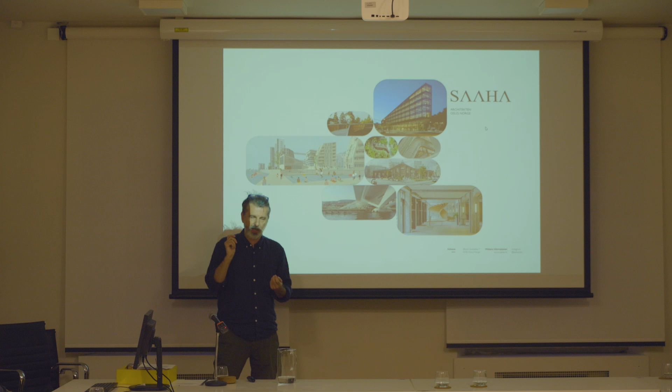There's another tendency and trend we all see, for sustainability reasons - I think architects, traditional architects, if we're going to have any role in society in the future the way we had before, need to start designing with the surroundings or environment as the starting point - outdoor spaces, biology and landscape. So I'm almost tempted to take a master's in landscape architecture, because it changes the way you enter the project, influences the project.

Bjørvika that we saw, I think it's also the first really bigger plan, and maybe the last, that was really designed with outdoor spaces as focus, and then the buildings came. Because what we usually do as architects is first think of objects and placing the square meters, the heights, and then the landscape architect comes and fixes some greenery in between.

I hope the future is more that we start with landscape, start with outdoor spaces, because that's something we can all agree is for the common good, and at the same time has a positive consequence for the economy. It creates value for whoever is the investor, and it's easy to communicate that. Everybody kind of wins with focusing on outdoor spaces.

So that's a kind of point, even with the choice of colleagues I brought with me from Norway - that was already a point I wanted to make, that there is an important tendency there.

I need to say a bit about the office. I'm between Oslo and Sarajevo, now a bit more in Oslo than in Sarajevo, but I lived there after the war for 3-4 years and started an office there too.

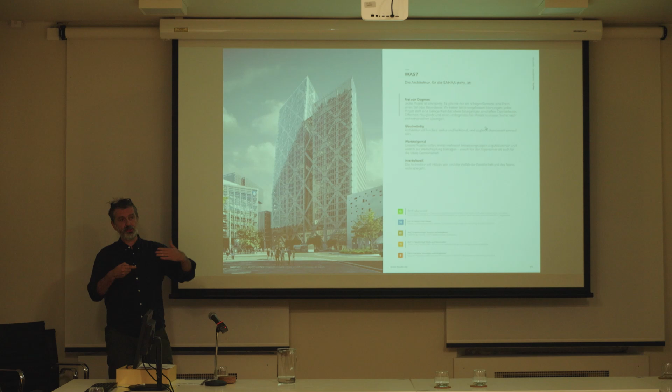We are just 12 people, but out of 12 people we are from 7 different countries. Aside of Scandinavia, there is Singapore, Germany, Slovakia, and this influences a bit the way we approach discussions. We all have this kind of relation to another context, but also a position of somebody who observes at the same time while we act, and that gives sometimes interesting perspectives.

What we do and how we do it is that we try to always cooperate. Even this thing here, it's cooperation - I kind of reached straight away to you too. As a small office, if you want to be involved in a bigger project, that's been interesting for us, because I earlier worked in a bigger office with many more employees.

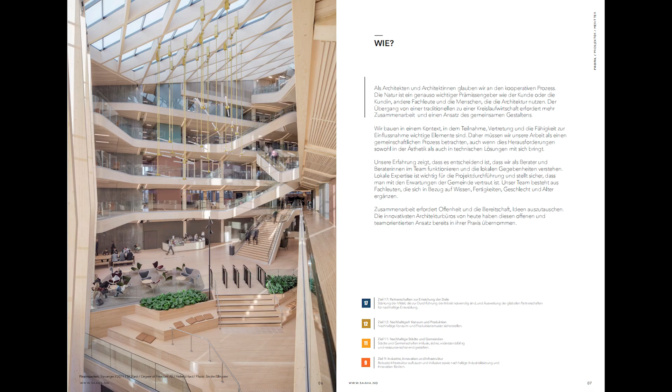We also think, for us as an architect, we like shifting scales from small to big. So I'm, at this point, involved in several detailed zoning plans, but we also work on very small projects that are kind of an entirely different process and entirely different scale, because I think this keeps us more agile and brings different perspectives from each of them to these contexts.

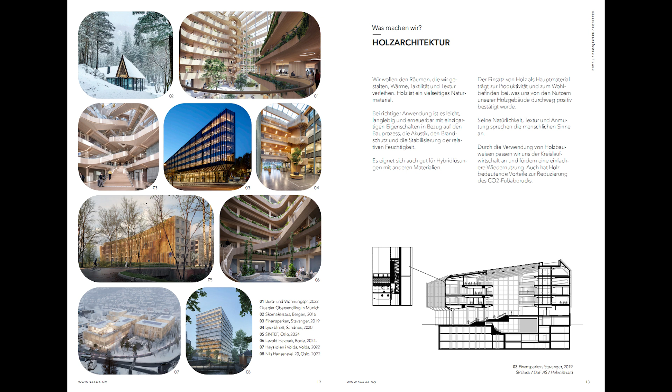Again, because we are small, we need to have a large network that we can always include, and most of our projects are in one way or another collaboration. We do a lot of timber architecture in Norway, some of the projects are built and some are underway. As a very few architects, we are also involved in infrastructure, so we built at this stage quite a big bridge in Drammen, the city that you were talking about.

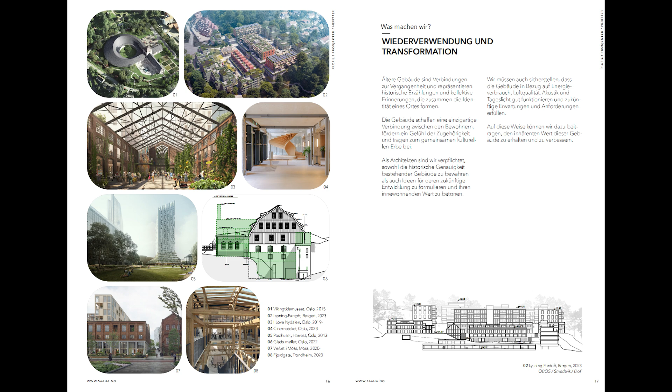More and more of our tasks are about adapting existing buildings that are often involved with the heritage authorities and these kind of things. Our office is also in one of these buildings - this is a power warehouse, and we sit here and overlook the river in the middle of the city.

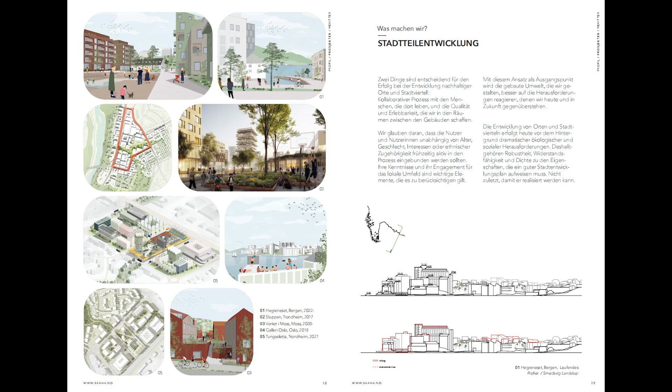And then, of course, urbanism, that we will talk a bit more on. And then I have this kind of bastard brother or sister in Sarajevo, where I have another partner, where we do a lot of different projects. I'll just briefly show you some of them.

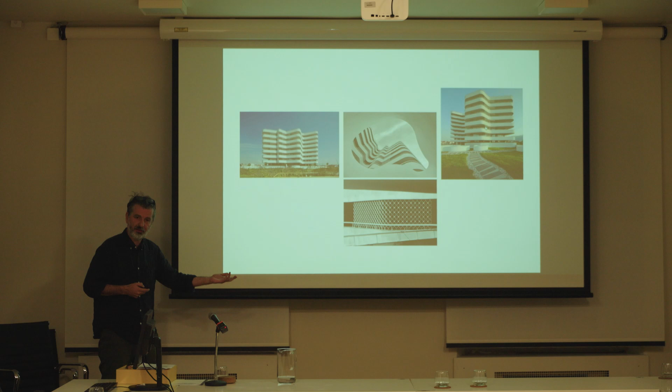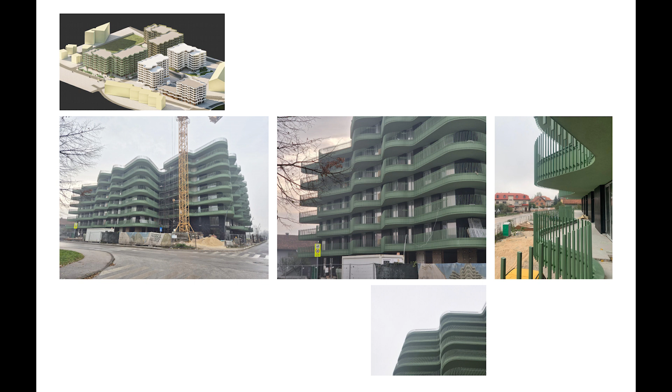So this kind of architecture for a regular housing project, for different reasons, is almost impossible to realize in Norway. And this is a next phase where we work with the same team. Every flat has a balcony, but we do another kind of detailing and another kind of variation on the same theme.

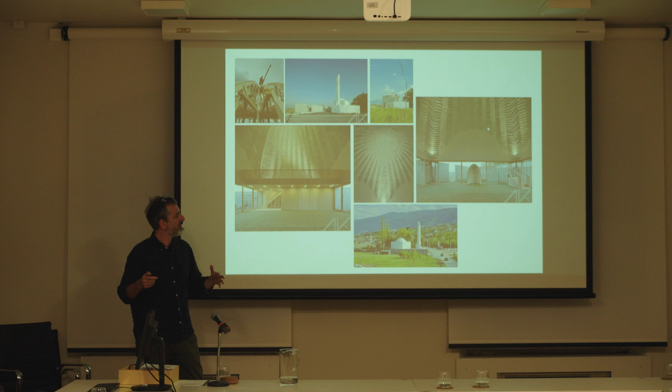We also do this kind of very small projects that are somehow important for me, because in the society after the last wars, there is this kind of fraught way of thinking about belief or religion. And in Bosnia, we always had these neighborhood small mosques that were just for like a neighborhood.

One of the projects that we are now doing for 10 years is this, because it's built by people who live there, and this is all cast in concrete. And for you that maybe don't know so much about it, in Islam it's not allowed to have any kind of elaborate pictures and stuff like that.

So we managed to persuade relatively conservative people to open all of the first floor towards real gardens outside. So instead of painting them on the walls, we tried to establish gardens on 3 sides of the prayer room.

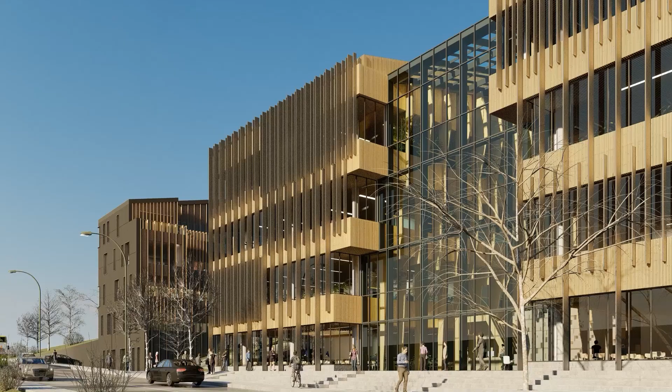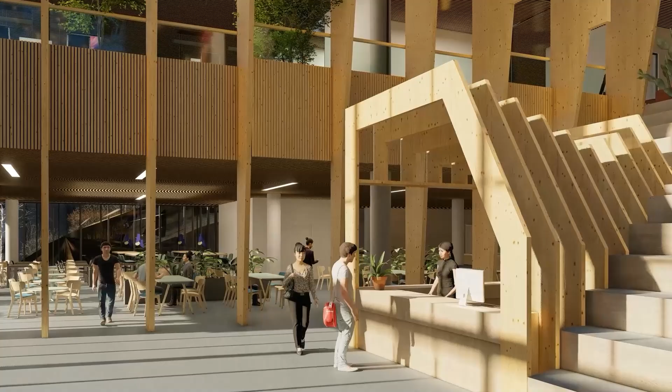This kind of project is one of the reasons why we want to shift between scales. We also do a project for the Croatian company Infobip. We won a competition against 3LHD and Amir Vuk Zec, where we tried to argue that whoever works in Infobip in Sarajevo, they should know that they are in the Sarajevo campus and not in the Zagreb campus or in Vodnjan.

This idea of all the Bosnian canyons, river canyons, results in this space that connects the park behind the building and the entrance, car entrance in the front - that was a theme that we worked with there. We also introduced timber as something that we have a lot of in Bosnia, but use too seldom.

And the office, in this kind of structure, exists for 10 years, and we've managed to have some success even as a quite small practice, and to be nominated for some prizes, which is always nice to get that kind of recognition.

So, the importance of compromise. We've already talked a lot about this, the fact that we need to find a way for everybody to feel that they kind of win something in these kind of processes.

I will touch upon in more detail how a regular zoning plan is done, and exemplify it through a project we just delivered. We had the second delivery of a zoning plan, meaning it goes to the town hall to be politically approved and cleared of all issues that need to be cleared off.

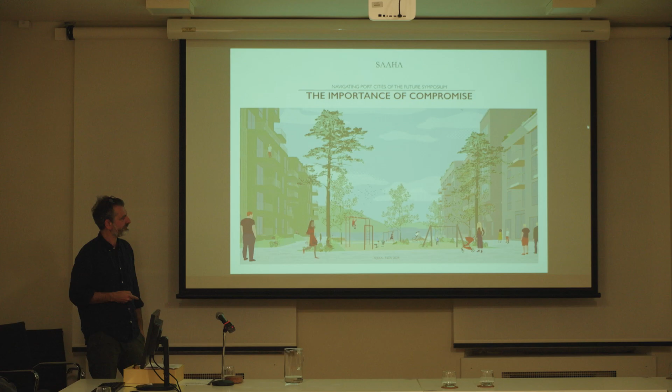So, if I place this slide in front of you and you read it, what's your first association? What does it make you think? Lack of trust between the involved parties. Politicians don't trust their own experts, the planning office and other specialists. Investors and politicians, depending on which side of politics they belong to, are either too distrustful or very naive when it comes to private investors' intentions and ambitions, and the general public doesn't trust any of the sides.

And I also think the plan of Bjørvika is probably not any more realistic, because something happened in these 10 years. That plan was approved just at the last moment. Maybe there are also global issues, and I feel there is a certain balkanization going on at several levels in the global context of how people deal with each other. This has become reality, also in Oslo.

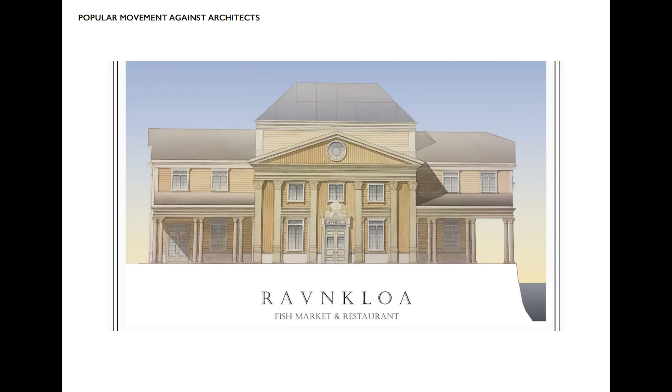I want to exaggerate this point a bit because, of course, when we come from these areas, we all think things are rosy and nice, but this is an interesting thing that contextualizes where we work and what we, as architects and planners, also need to somehow deal with. We need to figure out how to navigate in this landscape in a good way.

But it is interesting because it kind of oversimplifies the architecture and development of urban development, reducing it to aesthetics and facades. This has also been a quite public debate. I think what we can thank them for is that they really brought public interest back to architecture, because before that everybody was used to that kind of architecture.

Scandinavian architecture is respected abroad, but this varies a lot between the Scandinavian countries. So I think, Ellen, maybe this wouldn't be possible today, the Barcode project, because it was in a specific time after the financial crisis when the Bjørvika plan was approved. With all these different factors, the way things are done, maybe it would have looked different today.

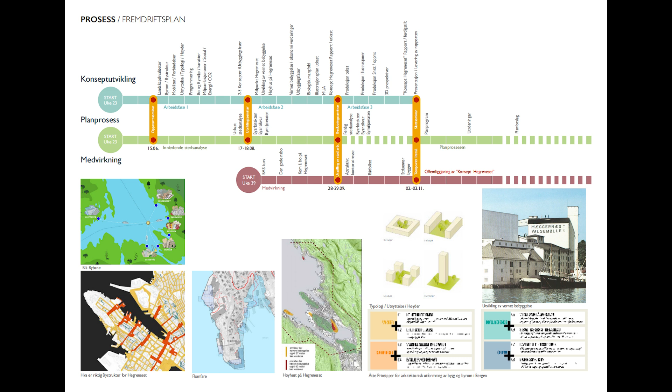And they should relate to what already exists in terms of strategies and plans of the city.

One of the important strategic documents in Bergen City is called Architecture Plus, developed by a city architect. It's important because, with the way our profession developed, we somehow developed our own language that nobody else understood but us. This was also causing issues in the zoning plan processes, because people used the same terms but really talked about apples and bananas - they didn't have the same associations when they used the terms.

So what the city architect did was make a popular version of what they think quality in architecture and city development means, and what they want us to discuss when we come to talk with them. I used Google Translate to translate this document - it's only in Norwegian, unfortunately. But there were really simple points, and for each point they did extra texts to explain what they mean by it, what they mean in a local context, and exemplified it with some projects.

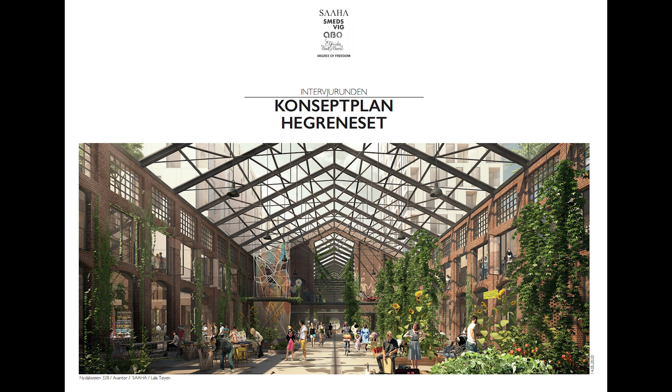So when we come back to this concept plan Hegreneset, this is the site. It's a kind of peninsula, almost like an appendix. City of Bergen is here, the architectural school in Bergen is here. It's very much part of the fjord - when you enter by boat, you enter like this and see it, then you go back to the sea.

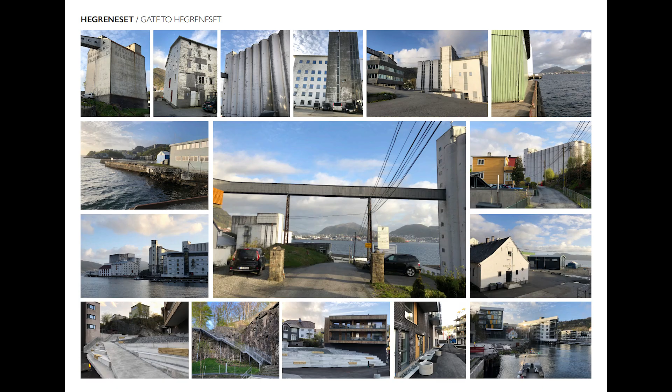It was obviously an industrial zone before. There are some buildings with heritage value that are protected, and some that are not really protected - they're listed but not fully, so there's a possibility to discuss them. It's a very diverse and quite resourceful neighborhood in a vicinity that already exists.

Our brief was summed up like this, and both the city and the client - this is a bit of the old way - talked about how do we make this area a destination. In the context of Oslo and Norway in general, when you say destination, very often architects think of objects or a building that's a goal to get to, or something kind of expressive.

What we did here is collaborate with a landscape architect called Smedsvig, and we also have a local zoning specialist who is good at writing the zoning rules. We are only architects that push forward and run the process, while they do a lot of the handcraft themselves - this is something we always do. We always work with local offices, because you lose something otherwise. You can travel there and do a lot of registration work yourself, but there's something about having an ear to what's happening locally that's hard to pick up on if you don't have a pair of ears in the city.

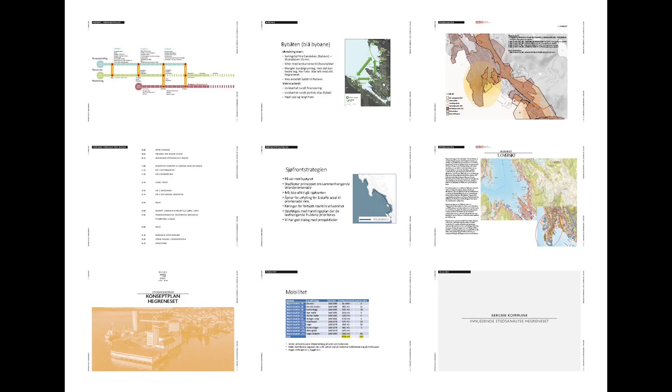After this initial phase of planning design, we approached the project. We studied, of course, history. We studied the landscape. We studied the social infrastructure that's there - what do we need to answer?

Is there a need for school, for kindergarten, for these kind of things?

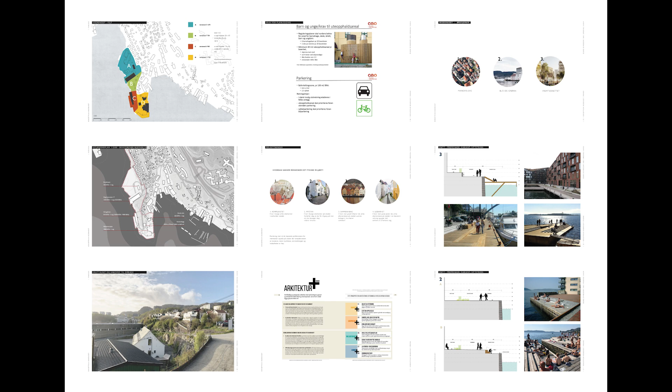We also started topographically to cut the land to see what pieces this consists of. We understood very fast that this area with villas is a kind of resourceful neighborhood that we knew would have opinions about the development, because these villas are protected—some of them because they were built by a famous Norwegian architect, and built in relation to the industry activity there. So there was a kind of value, not necessarily individual, but as a neighborhood, as a representation of a certain time.

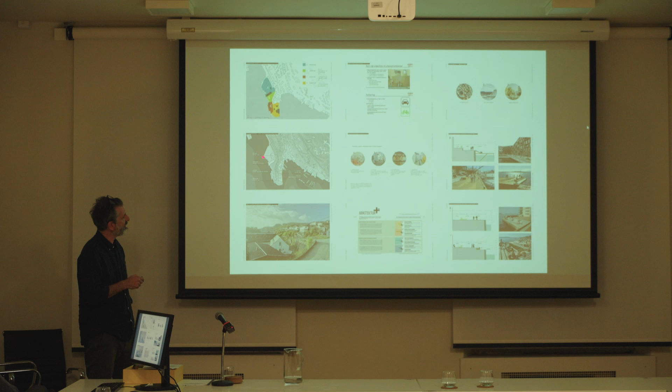We started also straight away discussing the edge towards the sea. Some places are deep water, some places are a bit more shallow. This combined with more concrete provocations on what development could look like in the future, with some concepts trying to take inspiration from historical images and maps that we found there, and just a lot of iterations of different things just to provoke.

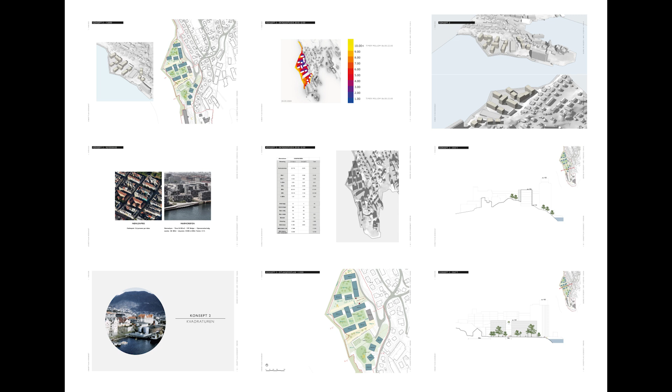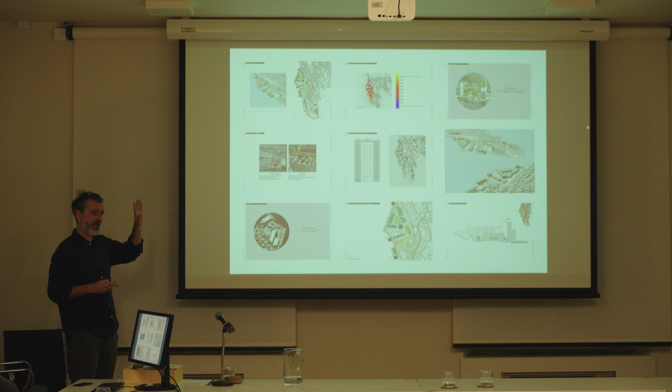This same material is used towards the client and towards the municipality. That's something we always try to be conscious about—we don't make different presentations for a client and for the public, and we try to agree with the clients on this issue.

Maybe what we kind of take away is the numbers, because that's not something we should discuss about—it's not about numbers in a way. In these initial phases, rather than designing too far, we use a lot of references to what kind of architecture, what kind of public spaces, all sorts of things.

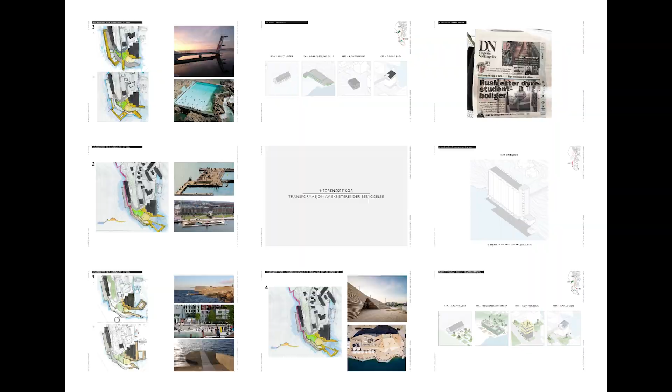We try also—the landscape architects start already designing some meeting points with the sea and what that could be. We looked into the buildings that were listed, what they could contribute, and this is almost our own project. We had a group working parallelly analyzing what the heritage, the listed buildings, could be in the future and how they could be used.

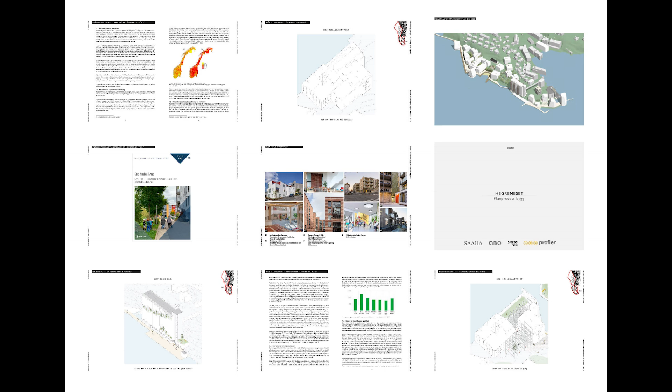The issue with listed buildings and investors is that they see it only as a cost, because of course they are very expensive to adapt, and they are rarely a type that can be used for housing.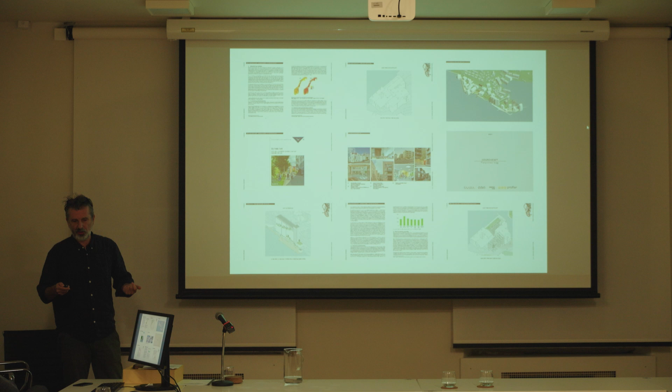So in our case, we ended up proposing a silo as housing, and a little piece of this old storage building, but the rest was proposed from our side to be a place where you can have a communal house that you can rent for a birthday or a wedding or something like this.

This was developed in more concrete sketches—again, this is just a concept plan, and I show it because it, of course, changes through the process. What we did agree is, because these neighborhoods want to keep the view to the sea, we need some kind of communication lines going through the different places.

What also really appeared as a discussion very early on is that we propose each of these areas should be car-free, because it's almost like no place for anything else there. This ended up with a solution that our client gladly accepted, which isn't always the case—they need to build a tunnel that goes from here, leading to a parking lot under here that serves the whole area. The rest is car-free.

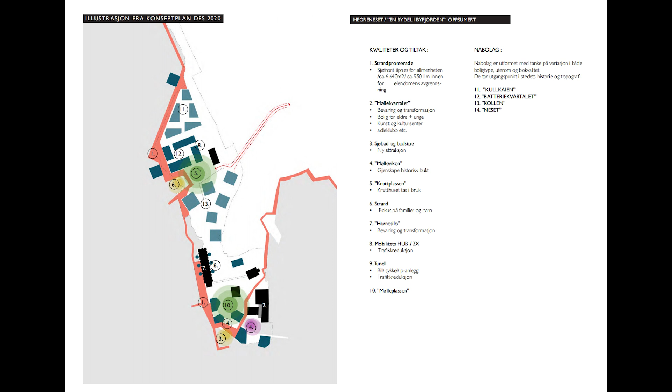So the distances, and what this destination in the project ended up being, are two public spaces, two kind of squares—one in the beginning very oriented to the sea and one more enclosed. This also changes a bit. Of course, again, the line of connecting the shore and the possibility to continue northward. It's approximately 950 meters of shoreline that will be made accessible to all neighbors, also the ones that are there from before.

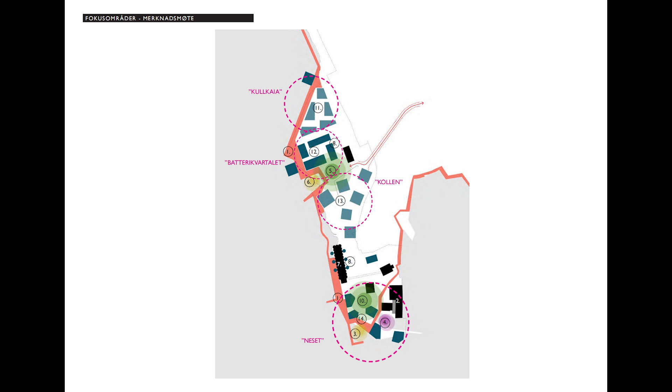And there you start developing also identities—you start developing names for each part, because here it was a place where at some point there was a coal storage, so that takes on a certain identity and tries to build on that. Originally this was used as a battery place for guns, because it was a kind of fortress very far back.

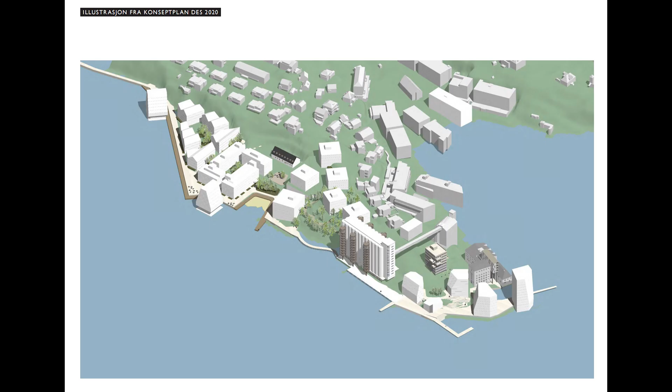And then, of course, the Kollen means the top, and so on. This was the physical appearance of a concept plan, which we discussed with the municipality. We developed a lot of sketches trying to envision what kind of spaces this could be, and we consciously kept them at a sketch level, because there's been recent debate in Norway about architects making overly realistic renders that don't actually happen in reality.

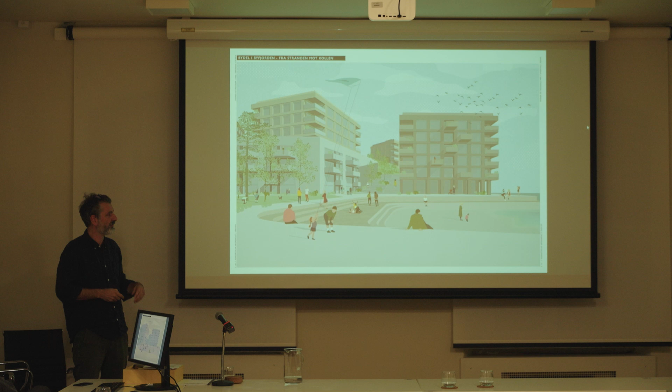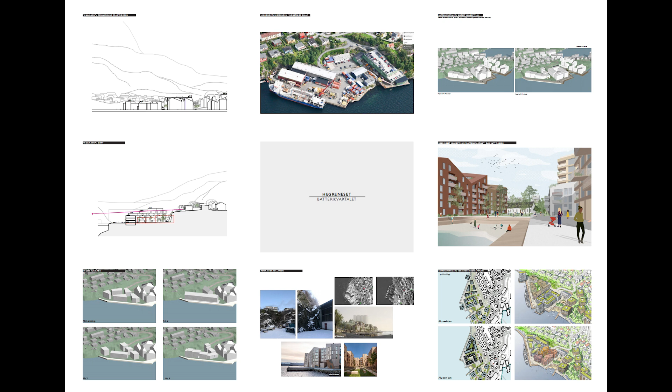So we made clear this is not necessarily how it will look, but tried to show the intention and ambition of the project, and what kind of connection we want to create. It was a separate document that became the basis for the planning initiative, then development started.

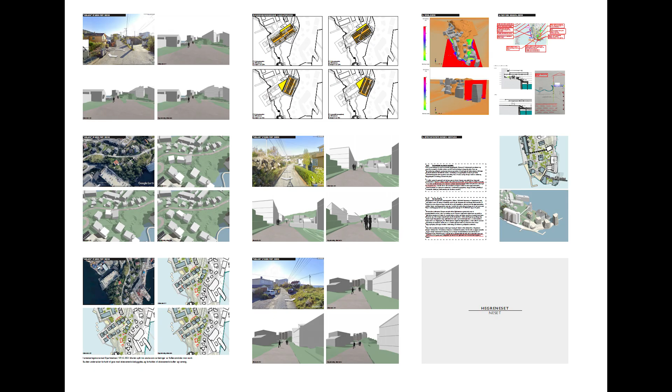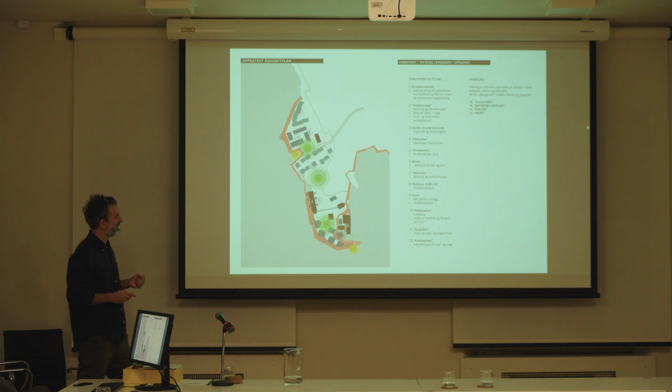New iterations then happened with the municipality. I'm not sure if all the time spent in this phase is so valuable, because you'll see what we end up with in the plan at the end. There are changes, but in the planning map, a lot of things we already decided remain intact. This is after one round of iterations with the municipality, and it became the basis for the first submission of a plan.

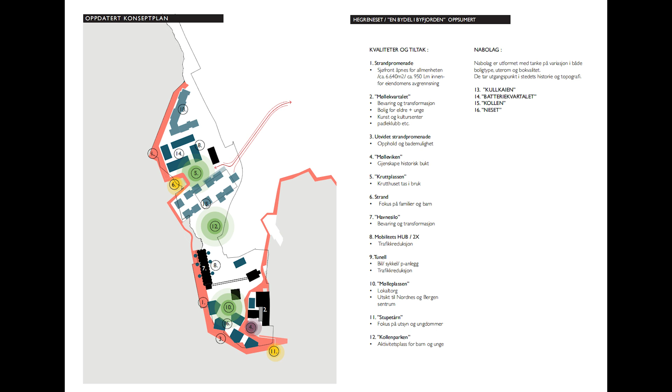What we managed to persuade and find a win-win for everybody was getting the municipality, and also our client, to agree that this place, which today has only 2 detached houses, stays unbuilt and becomes a kind of central park between the northern and southern neighborhoods. We also argued it's cheaper, since that's the kind of argument they respond to, because it's cheaper to build these buildings if we push them north, since it's already flat and you can devise a tunnel that's cheaper to build. So there are pragmatic reasons why it ends up like this, but it wins back a big value for the neighborhood as a whole.

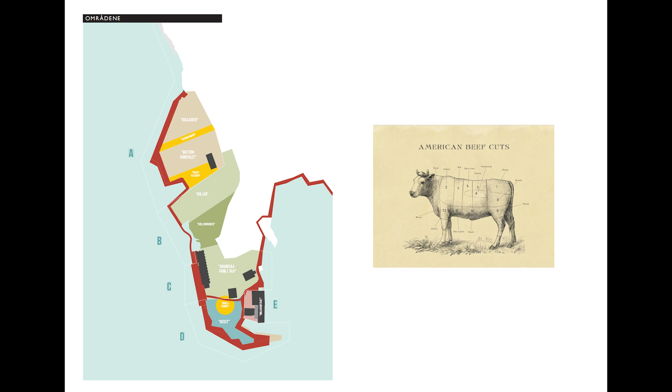This park also adds to the destinations still there in the north and south. After a while you start doing these kinds of divisions - how does this happen in reality, in phases and so on. This becomes the basis for a planning map.

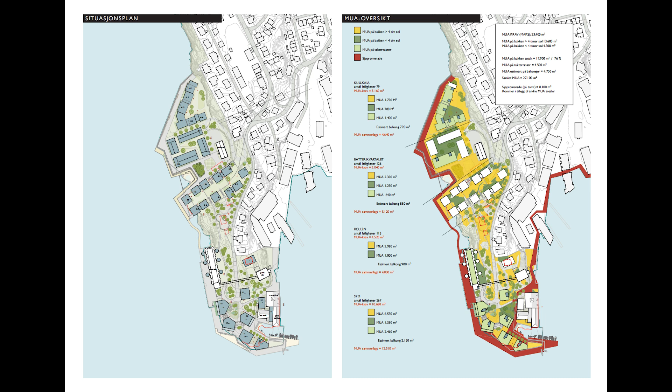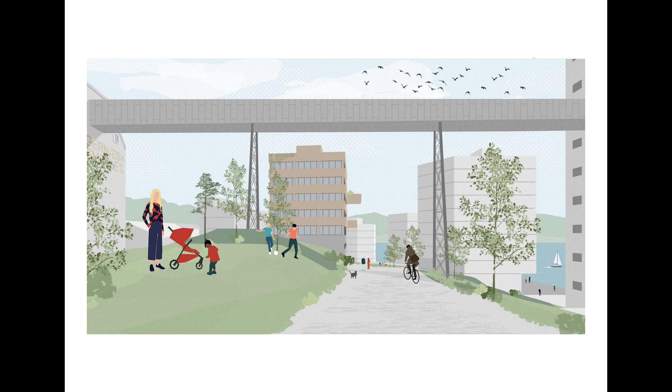The landscape architect develops an illustration plan showing what this could be, accounting for all the outdoor spaces needed while still allowing you to build the housing, plus more sketches showing what these public spaces could be and how you approach the area. You saw the image initially - how does this affect things, but also how do the owners of the villas still keep their view? This is an important illustration to help get the plan through.

But then, you know, after you deliver the first phase, we are now with the municipality. You have a hearing first, so everybody can respond to the plan and give feedback, and you get a table with 150 comments on your plan, where maybe 35 are from private owners of the villas, and the rest are all from the departments - heritage, water and sewage department, and so on.

Yeah, they are very important, because you need the infrastructure to work, you need agreement, and also mobility in a way they accept - there was discussion about how you clean snow from the public spaces and all this stuff. So they need to accept reduced access for cars for the sake of housing quality, and this needs to be sorted out. Then this ends up as maps and formal documents developed as a result of that.

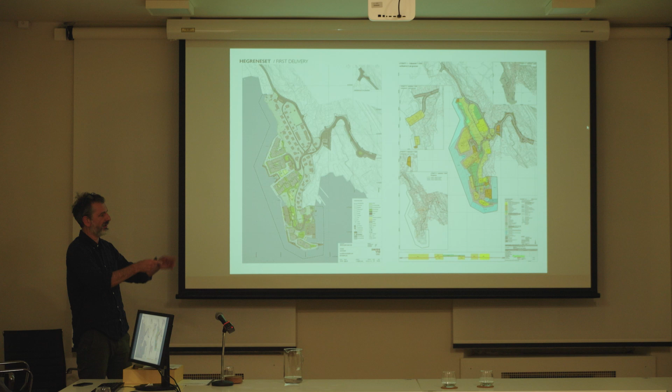What's also interesting is that the tunnel suddenly splits into two arms: one goes straight into a parking lot, using the height difference between the two levels to kind of disappear under the buildings, and one arm goes over here for bikers and pedestrians, so cars and bikers split under the ground. Of course there's an enormous amount of attachments that follow these plans, but these two documents were, strategically, the ones really defining what needs to be seen as a quality that shouldn't be discussed later on.

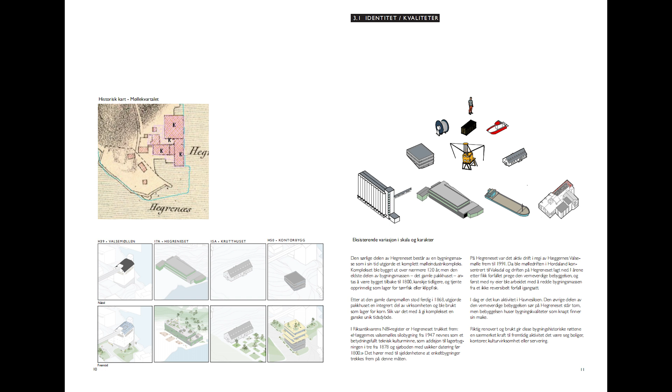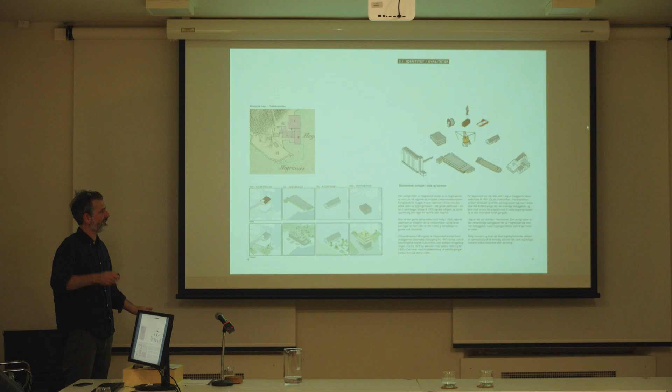I wanted to show a few pieces here. We discussed historical buildings, and we found this little bay that was there before, which we reopened in our plan as part of the project. There's also something interesting about this place—it was always used with really large scale differences, because of the silo, individual housing, and the boats that are big. So we wanted to keep that in mind while working.

And then there's this really great wooden building that was, of course, storage at some point. Both these two buildings are listed. It was decaying—some floors are disappearing—but the structure is intact.

We proposed to remove some things and open a passage through, making this part a kind of communal kulturni dom—something you can use as a neighborhood space, but not a cultural center in the organizational sense.

For these parts here, we suggested that—because Norway has a bigger and bigger elderly population—the projects that are always difficult to find a place for are the ones developing housing slightly different from the standard housing sold on the market.

We suggested that these buildings, which are difficult to develop as regular housing for the market, could be discussed between the municipality and a private investor—whether this could be housing for elderly, students, combined with an element of communal function.

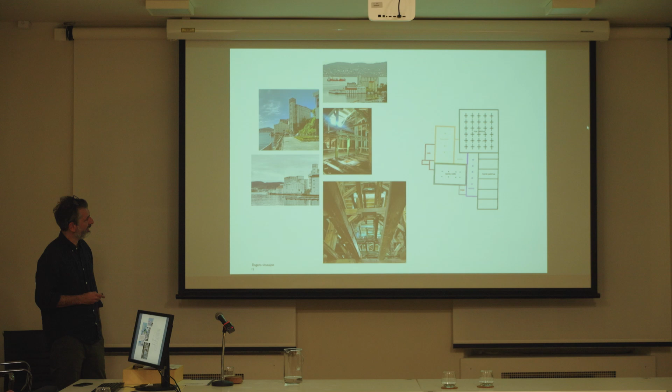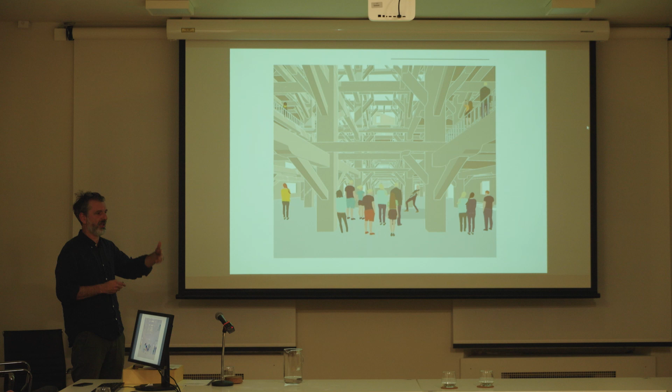We saw this as a kind of cathedral that can be kept as a raw building inside, one you could rent out, either for a birthday, a wedding, or some kind of school celebration from the neighborhood.

We studied the structure quite thoroughly to figure out if we could add some floors and how to do it. We also discussed this—it wasn't done just by us, but by people who are representatives of a cultural guild of the city.

People running different cultural institutions discussed what this could be, what it could be programmed with, but without deciding it.

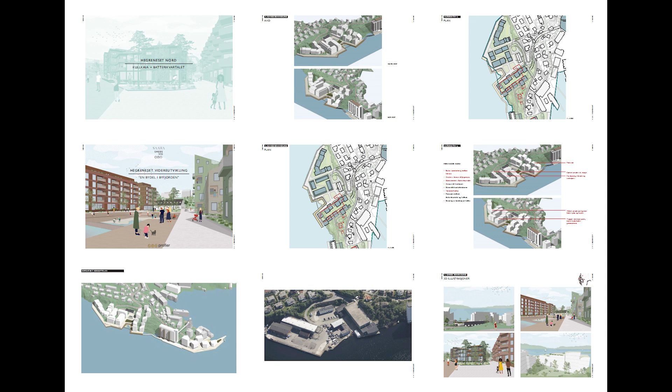After this, it takes time—it's another round of iterations and nudging to get everything cleared up.

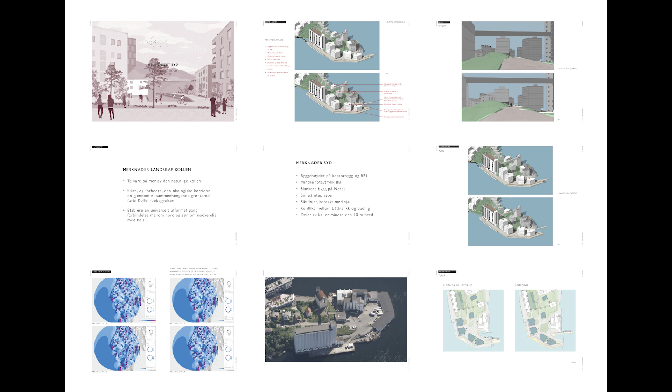I'm not sure if we even looked at totally different typologies for this place to see what kind of area it is, including both wind and sun and these different factors, because there are quite high tides and also waves in these areas—just to make it a comparable, equally long list of attachments.

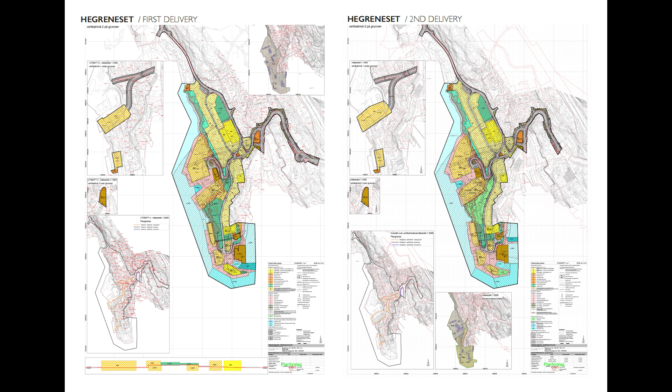A year spent, and there's not so much difference here. It's a lot of resources used, both from the public side and from the investor side.

In a way, I think this has become an issue, because society is really—well, it's over-bureaucratized—so you get this process of iterations that don't necessarily lead to better projects. Maybe we try to agree on things that we could agree on later, in the building phase. So I think it's an interesting time to evaluate this at the end.

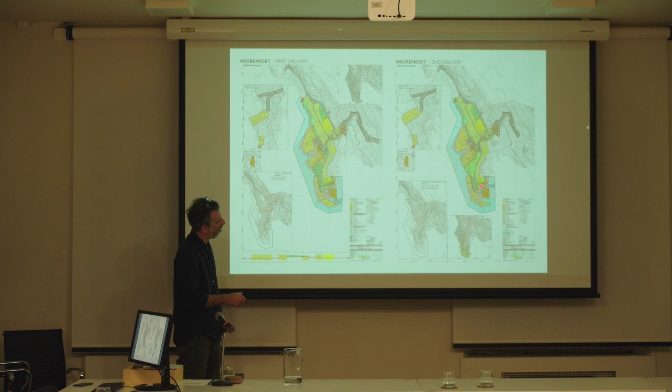You see we have exactly the same thing we had in the beginning: one destination public space here, another one here, a park in the middle, and the whole coastline free and accessible to the public. So all the qualities we had from the concept plan, which took half a year, are still intact—but we then spent four years developing things into a formal solution.

I think the benefit—I mean, it sounds weird—but I think our client expected this to take much longer than it actually took.

So it took 4 years, and we are now waiting for it to be politically approved, and it will be approved because everything is cleared up. But I think it made the process smoother.

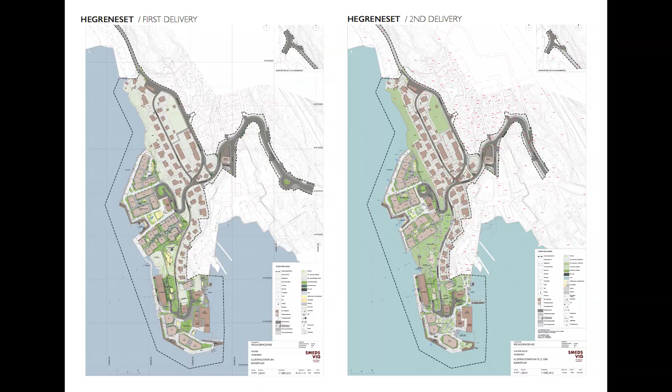I forgot to say, but in this pre-formal phase, because in formal phase, also like here, you're obliged to do participation, but it's very often just to tick a box rather than really influencing something, because the plan is developed so far that you cannot do such big changes.

So we did have a workshop with the school. There is a school over here, and we did it with the neighbors about what kind of functions, public functions or services would they like to be present when the shoreline is open. So there's like public toilets, a place to store canoes. I mean, it becomes very concrete.

And also it was very easy, it gave us arguments towards the client and towards the municipality to use the first floor of the silo, and to kind of also keep this part less commercial of the old buildings, because we could kind of say that we can care for that kind of functions.

But we wanted just to have, because of course these courtyards, they are very much kind of micro spaces for those who live here. But we wanted to have this hierarchy in a type of spaces that makes this a bit more accessible, so that all people who live here can feel that they can get there without really intruding into somebody's private area, while the private areas are more kept towards the courtyard.

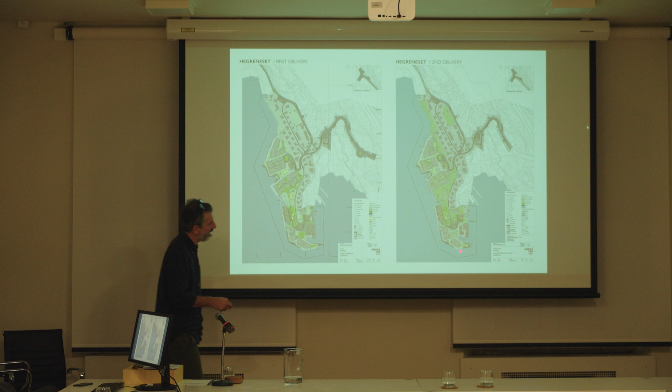And then the park, and the same here, the value, I think, the biggest value of dialogue with the municipality is that this did open towards the sea also. And because there was a building here before, but this building did become larger than I think is good for the area. We tried to keep it separate before, but then it became one.

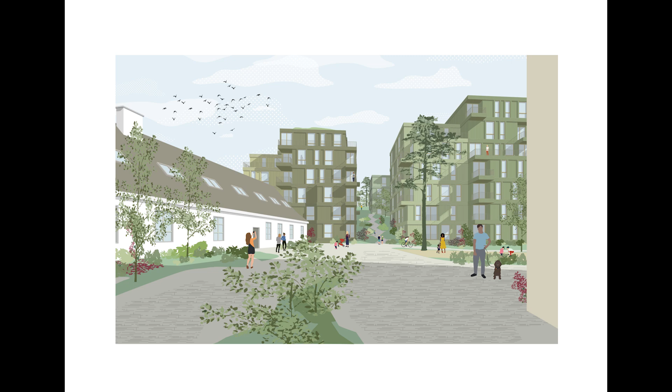Because the heritage authorities wanted this listed building to be visible earlier. So it's this kind of pragmatics of a thing, and then back to this, this is the only kind of connection that was a result of a new plan for this area that kind of reappeared, that I think is a good idea because it's a quite windy place in the winter, so to have a connection longitudinal from north to south that is a bit further away from the sea, it helps things.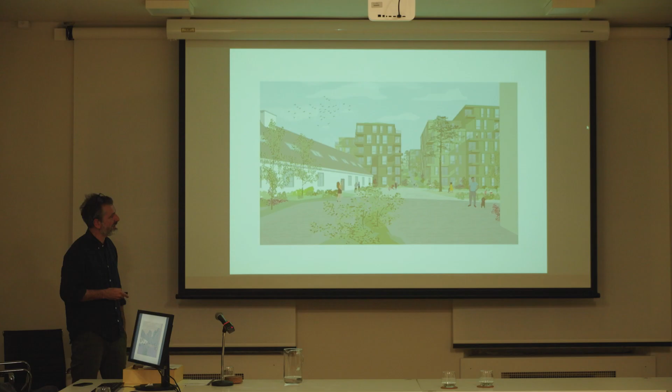And then what becomes a very big discussion close to the end is how do you do it in phasing, and what kind of public spaces should be developed in parallel with housing. So the client or investor has a responsibility to develop all outdoor spaces and then deliver it to the municipality.

And since they both need to build a tunnel and the spaces around, there was discussion because there are big costs. Of course, even when they build this, the cost of this tunnel and this parking lot and these outdoor spaces here, it's so big that they are basically still not making money. So it was a discussion how this should be made.

And I forgot, I mean, of course we discussed a lot of issues about services here. So the whole trash system is that you have a vacuum kind of system that collects private rubbish, and it's picked up here, so it ends up in the central facility, and it's picked up there. So there are no containers, everything is just in kind of bins that are in the ground.

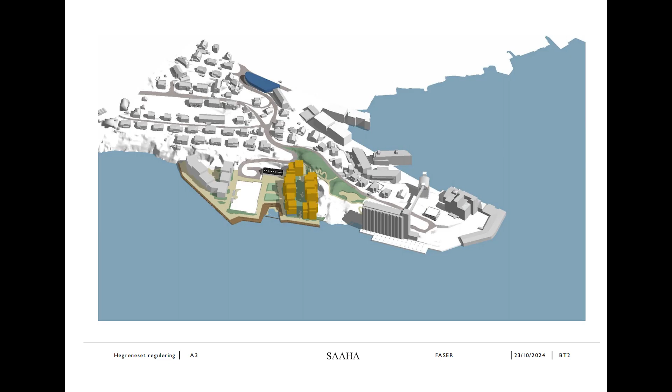But also this kind of phasing, when this is done, becomes an issue that is discussed thoroughly because it's juridically binding. So they cannot get permission to use flats before they build. That's what follows. It's probably the same in Croatia also, but it's kind of negotiations. So it's back to this process.

We can kind of, it is interesting to look back. It's interesting for me to look back at what was decided here and how much time did we use on other things, and what's the value of it.

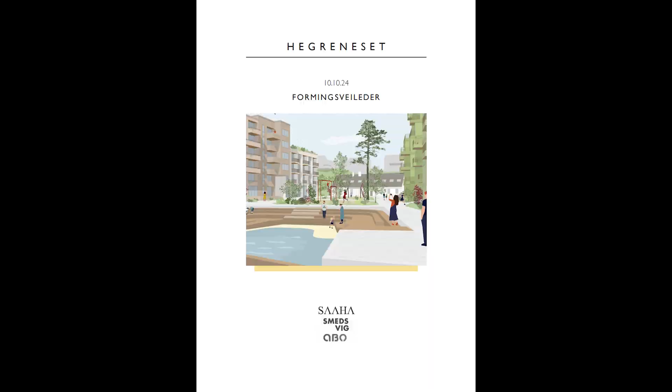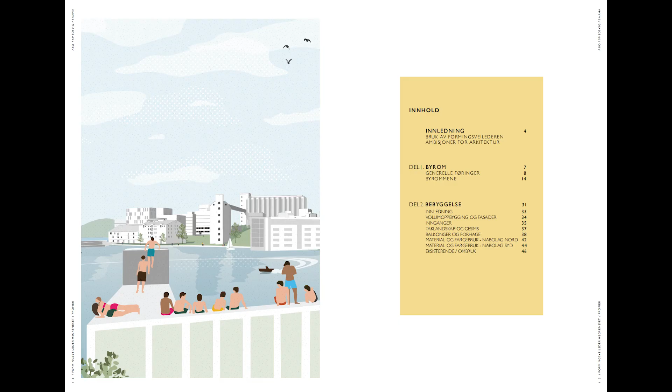The one document that is now more and more in use that I will briefly go through is that because the detailed plans are not anymore used on projects that actually will be built, we have a design manual that follows the zoning plan. So within the yellow patches that we saw on the zoning plan, the architecture can look entirely different than what we proposed. But then there is a design manual that follows that, which is used by the municipality when they approve actual projects.

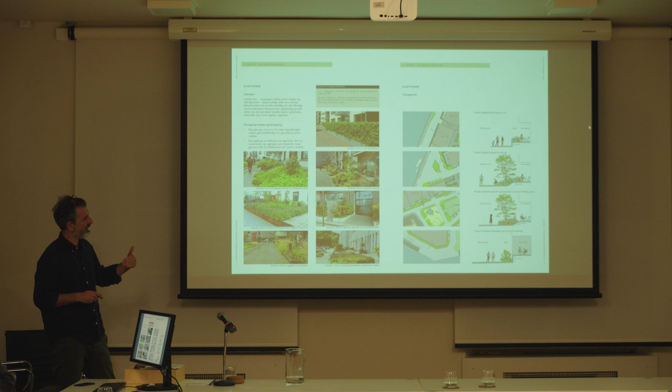There, the focus was clearly on the outdoor spaces and qualities that should be kept as guiding lines: the edges between private and public, protection from the waves and the sea, how you use landscaping and small level differences to deal with that. Each important space has been illustrated with some principles for design defined.

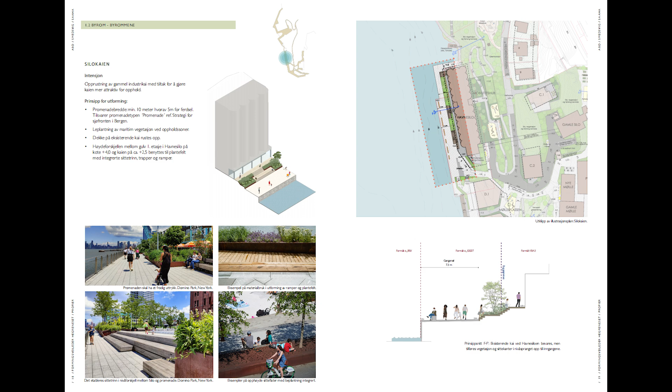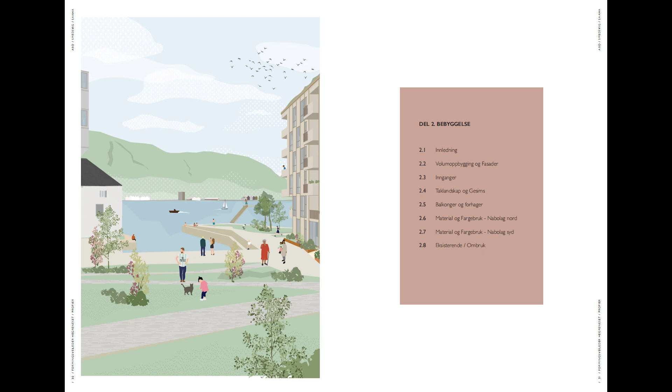This is also a legally binding document. So it's not only zoning rules and the zoning map, but also this document is binding for further development of a project. And then you saw how much it was about outdoor spaces.

For the buildings, it was mainly about character. Maybe how do you treat the northern part that should have a different identity than the southern? What kind of entrances? How do you deal with terraces and roof terraces? Where do I allow what kind of balconies and stuff like that? It's also often very important.

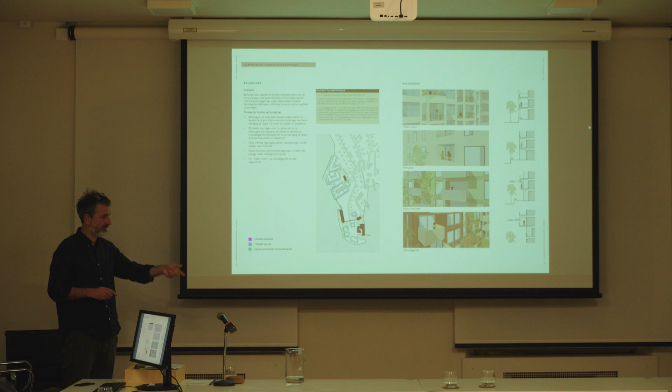It has to do, of course, also with climate and wind and where they're exposed, but also when is it above the public or private? And then also, how do we treat the first floors?

In Norway, in this kind of neighborhood, it's 95% housing, so it's only the old buildings that we propose to be used for other things. But then it becomes important that first floors of housing can also give something back to city life. So we also propose that they can have entrances from outside, more like a townhouse kind of situation.

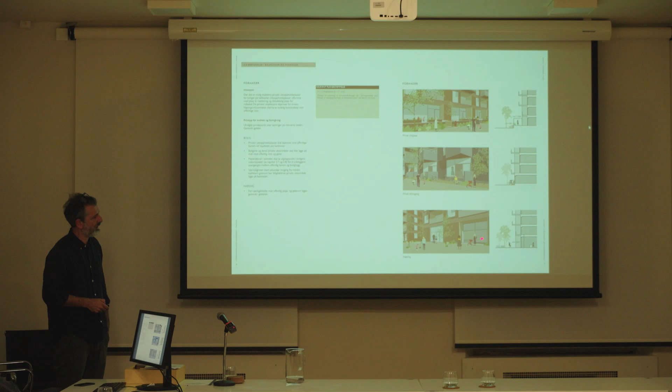Where there is a private outdoor space, there should be an edge between the public and private, with greenery and the height difference appearing there. And of course, when there is a commercial space, it should be without height difference.

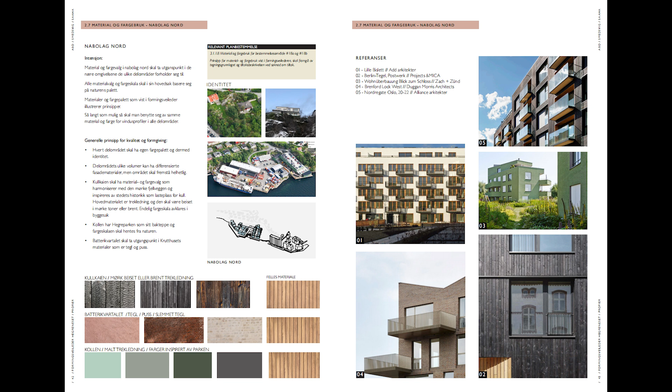We also discuss materiality on a more general level, not entirely decided, but to give some kind of direction for the north, some direction for the south. And some comments again on how the few principles were decided on a zoning plan level for the existing buildings.

I think what we managed to do here is to somehow get the client to think like this, not like the image I showed on the interview to get the job. I told them we need to figure out how to work together. We cannot first sell something to you and then go and sell to a municipality.

We need to find a way to work together, and also accept the fact that we are not alone on this job, that we use local experts with us, which helps them accept that. And I think what we've learned, as I told you at the start, and as Francisco has also done, is more and more focusing on this.

This kind of network of publicly accessible green spaces becomes a way to agree about important things, and that also softens the dialogue about heights and density and all this kind of thing, because the municipality then also sees that public interest is taken care of, and that certain qualities will be there regardless.

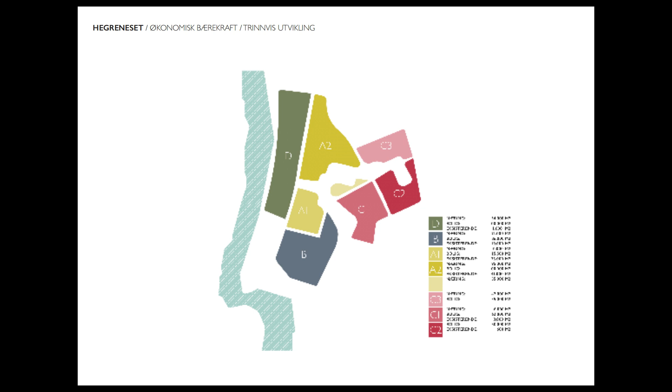And also being realistic about how the economy works, because we know that our client needs to pay for all outdoor spaces, so we need to have that dimension with us, because otherwise we will not be able to persuade them to do all the other stuff. And if you are not credible on that, it's very hard to build the trust that I started with, which is becoming an issue.

To round up, I think our role in this, both as architects and planners, is more and more to try to take the role of a diplomat, or a negotiator in between, but also to accept and allow that other people hold the pen in the process, and to think more of nudging rather than selling as a way of communicating our intentions in a project. It helps build trust and hopefully results in better projects.